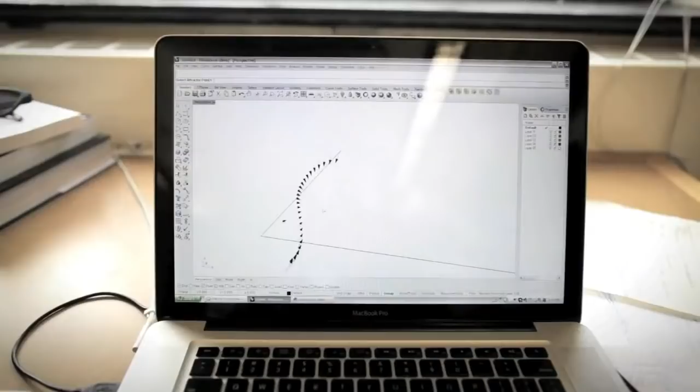MIT is a very different kind of institute. Instead of becoming the recipients of building industry culture, we can now change building industry by the kinds of experiments we're doing in school. MIT has a variety of departments so powerful that they have the potential of radicalizing what we do in design and architecture. Even the way we've structured our curriculum around workshops and collaborations fosters this cross-disciplinary platform. So we're situated perfectly for the kinds of things that only MIT can do.

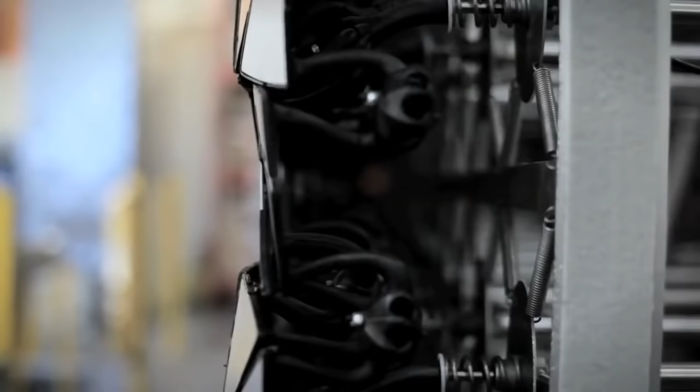The invention of human artifacts of any kind always consists of three elements: the geometry, the process, and the material that constitute that artifact.

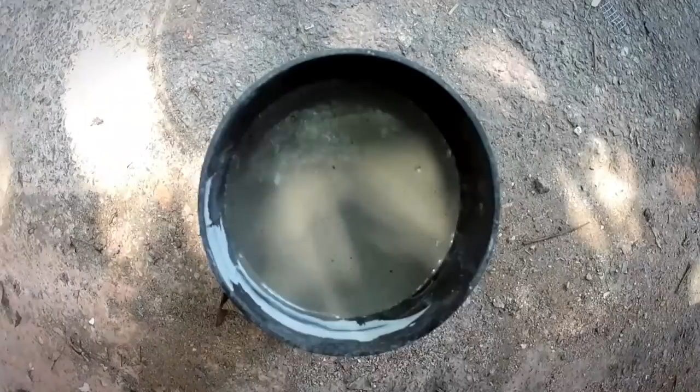It's very clear that new materials engender new forms, and architectural design benefits from addressing and applying new materials in an informed way. The Emergent Materials Group and the Urban Metabolism Group share a central interest in materials for the built environment. Lately, we've been working a great deal in the area of foamed materials, especially foamed cements and concretes.

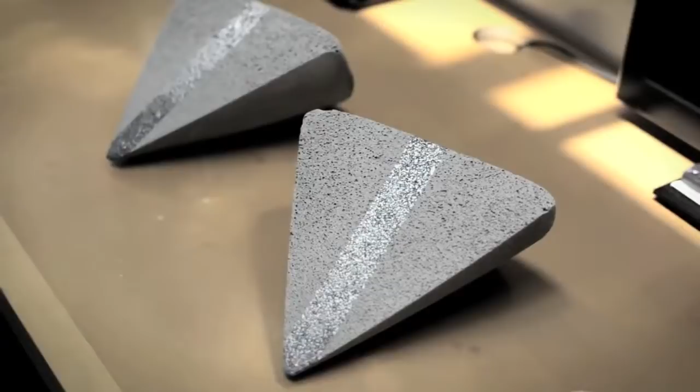Typically a beam in bending is going to have the greatest amount of stresses on the top and bottom, so we can reduce the amount of material on the interior of a beam.

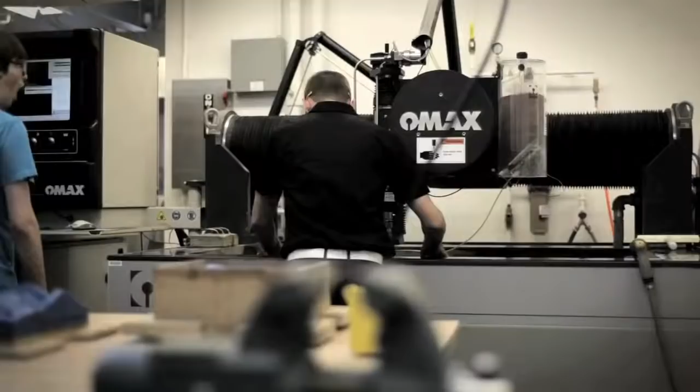The work really tries to address that there are two main paradigms throughout almost every industry. One paradigm is what can you design, what can you compute or analyze, and the other paradigm is what can you physically construct or build.

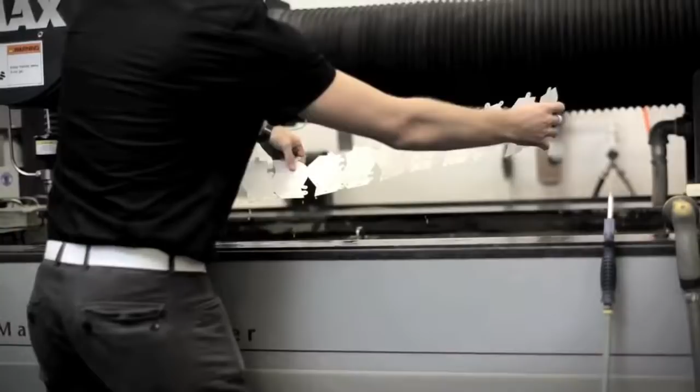The work really tries to traverse all scale lengths. It tries to work from the nanoscale, which is traditionally where we see self-assembly in biological and chemical examples, and bridge that, asking: can't we use this phenomenon of self-assembly as a new paradigm for building things at large scale?

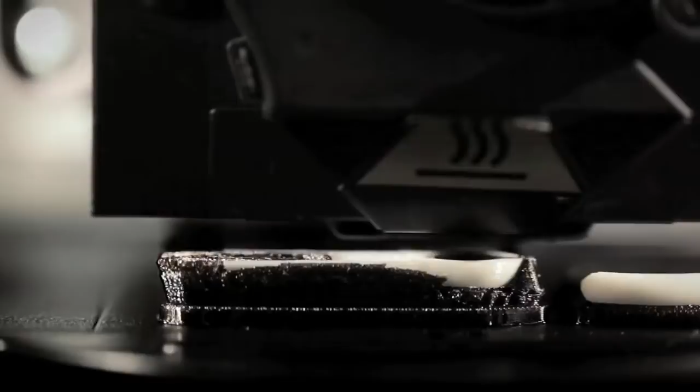We work with any type of material, synthetic or natural, and really try to design specific geometries that have materials in mind. When you design those two together, they can respond to energy. The energy sources can be heat, shaking, gravity, pneumatics, electronics—any type of energy. When you mix that with geometry and material properties, then they can respond and change state.

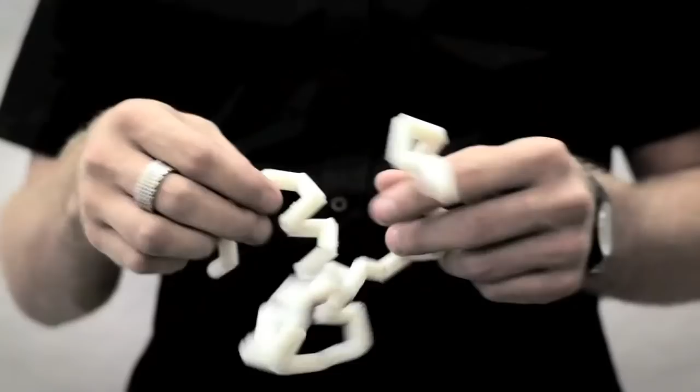Primarily, it will first be applied in extreme environments, scenarios where it's difficult to build. The research and the practice is really about cross-disciplinary collaborations between designers, scientists, and engineers working on this phenomenon of self-assembly, discovering where we find it naturally, where we can use it synthetically, and trying to apply that at all different scale lengths.

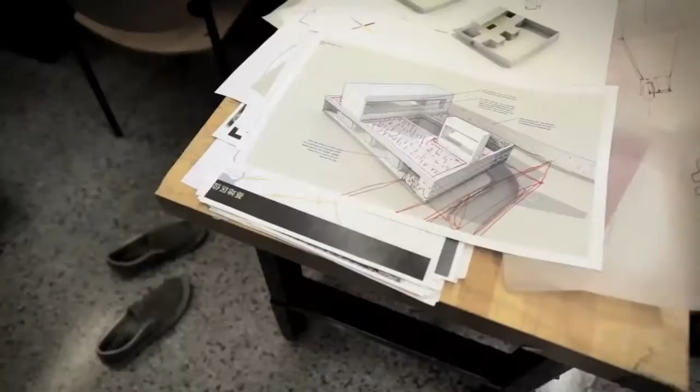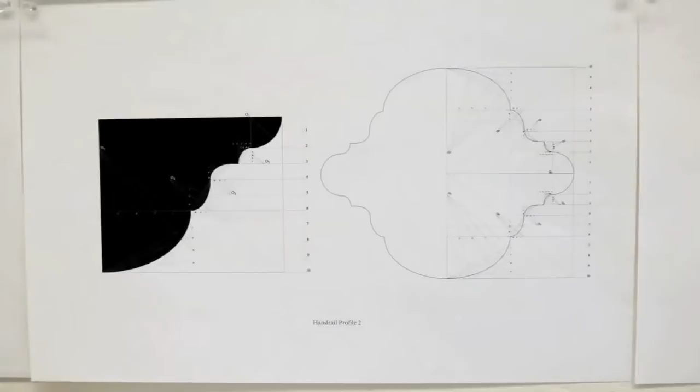The focus of our work, at least at this smaller scale—the scale of art installations or retail—we leverage CNC fabrication methods, but not as a way to exude their prowess necessarily, but more as a way to help us get at a particular formal agenda.

An installation called totems, which in a way is a kind of proto-architecture—not quite architectural, not quite sculptural—I think offers a kind of proposition to each of those disciplines.

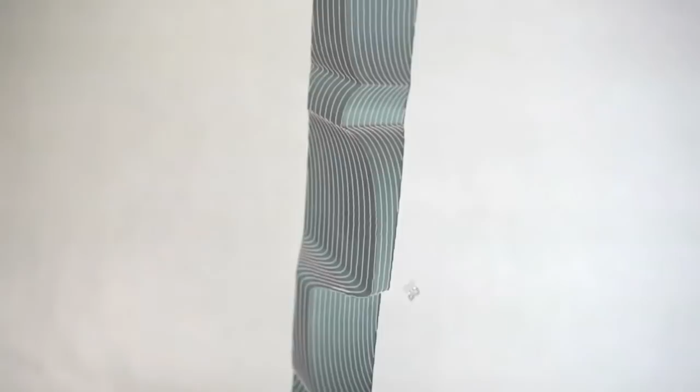We do a lot of testing via 3D prints. A lot of the formal investigations for totems specifically happened in 3D prints. We did maybe 30 to 50 3D prints of the totems as a way to understand how the light and shadows were working, and how best the anamorphic effects were working, before we went to the large format wire cutter.

In terms of collaborations, some of those happen here at MIT. Joel Lamere and I are developing an installation now, an anechoic chamber, which uses industrial felt both on its exterior and as a way to absorb sound on the interior. I'm bringing a disciplinary, formal, geometric interest on one hand, and also a certain set of specialized understandings of the behavior of these sheet materials on the other.

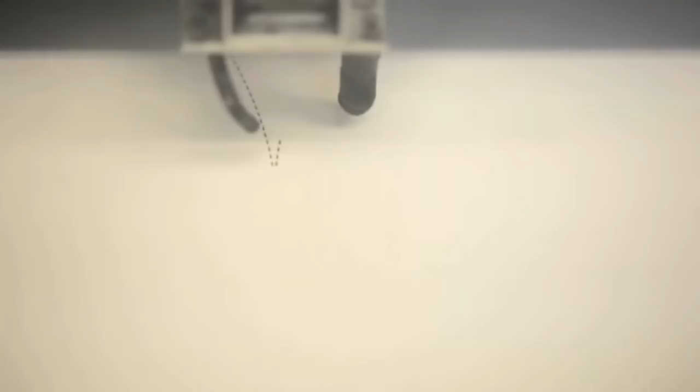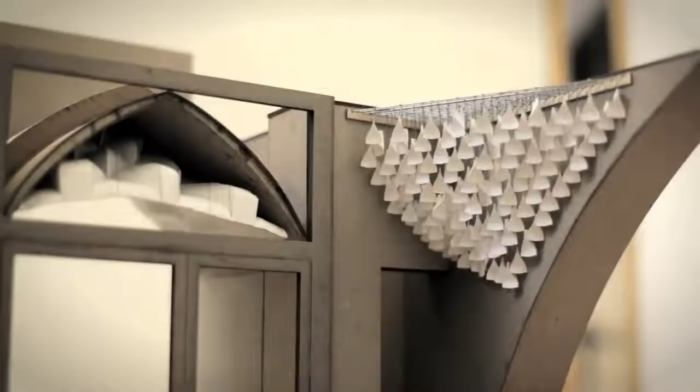My architectural interests are really broad, but in terms of my current research preoccupation, it's about material geometry—specifically sheet shapes or sheet material geometries, how they bend, stretch, stack, fold. Understanding sheet materials is really critical to architecture; there's a long-standing discourse on sheet materials because it's so ubiquitous in conventional construction. Everything including plywood, sheet metal, steel, aluminum, plastics—all of these have to deal with developable surface geometries, which is to say sheet shapes generally. So expanding the total set of understandings about sheet shapes is a totally worthwhile architectural undertaking.

These installations attempt to jump from the scale of the paper model to the scale of the architectural space, at the very least.

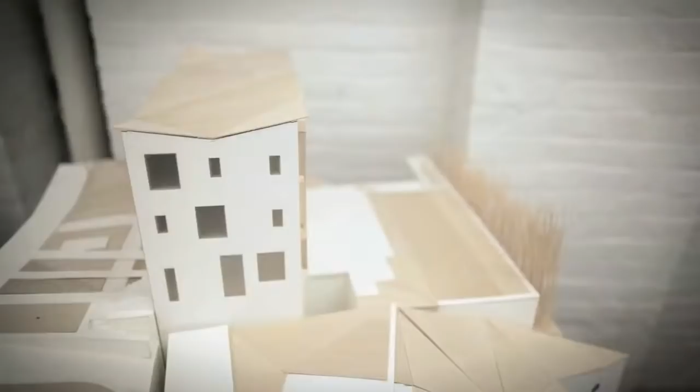Well, over the past 20 years, first as Office DA, now as NADAAA, we've identified two or three areas of focus. The first has been to look at materials and their behavior as a point of departure for many of the architectural experiments we do.

The second area is to recognize that materials don't have an endless limit. Everything comes in modules, in sheets, in blocks, in bricks, and without aggregation there's no way of beginning to figure out how construction works in general.

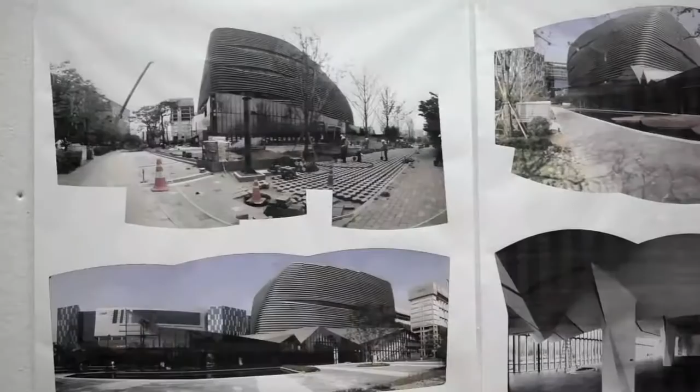So the detail of bringing things together as a point of departure has been another central focus. This has been a kind of point of revolution for a range of projects that we've researched and undertaken, some at the scale of a piece of furniture, others at the scale of a building, and others really at the scale of urbanism.

One of the agendas of the studio is to create interactive architectures for public space through design and technology. These projects can range in scale from the scale of the body, such as the Defensible Dress Project, which is a wearable architecture that uses a microcontroller and shape memory alloys to defend your personal space,

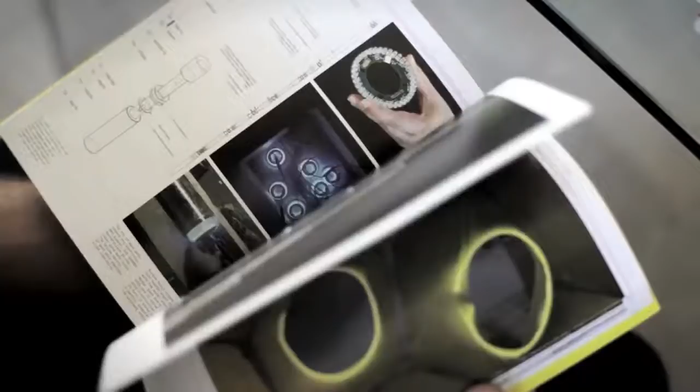to very public scale infrastructural projects, such as our proposal for the Audi Urban Future Initiative, where we're speculating on high-speed regional infrastructure and transformations in the city around issues of mobility for the year 2030.

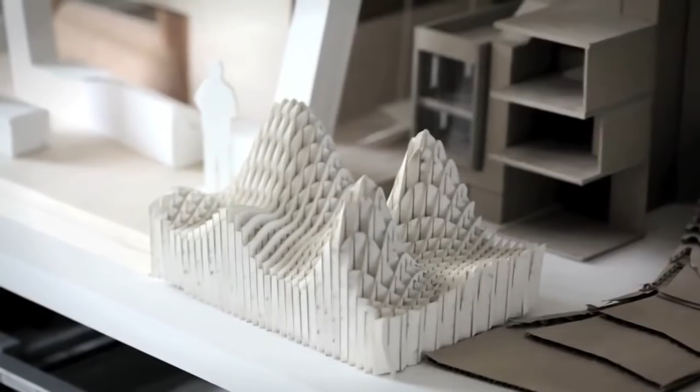It seems now more and more necessary that our environments have to become smarter, more responsive, and more flexible. The way in which architecture is made needs to be completely rethought if we're to go beyond bricks and mortar to engage the challenges of the next century.

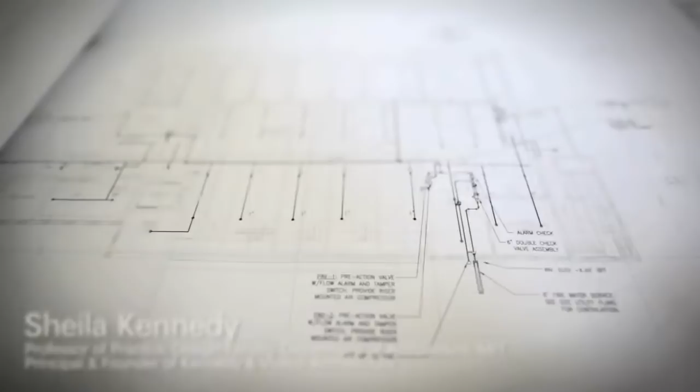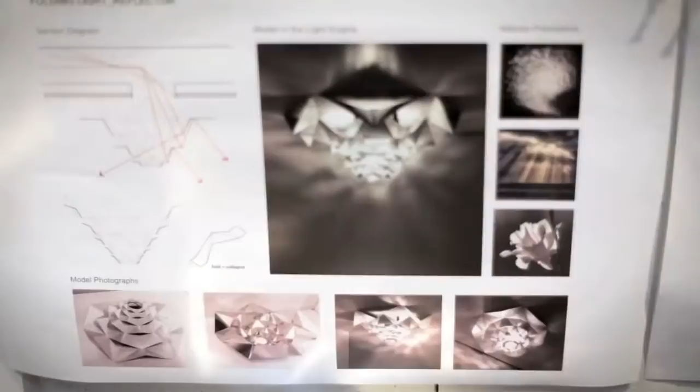My work as an architect focuses on designing architecture and urban scale interventions that engage the emergent infrastructure of our time. We're interested in how design engages that mutability between energy and matter, when materials generate energy or store it, when materials are dynamic and change state, exchange heat, produce light, or communicate information.

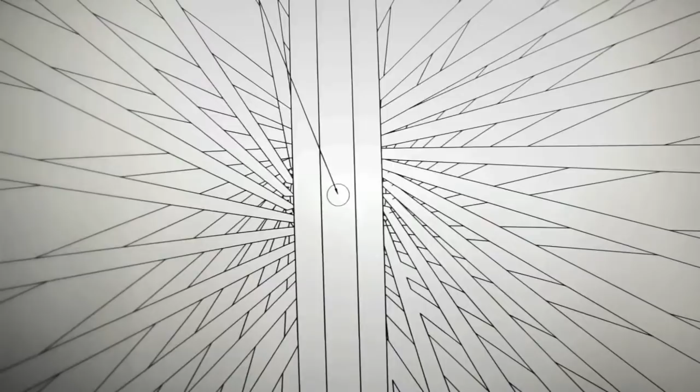The challenge, I think, for the discipline of architecture today isn't in digital fabrication, it's in material fabrication, in thinking about what it means to be material today when we move fluidly between digital and physical realms, how we use materials and not waste them, and how we form materials and how we transport them.

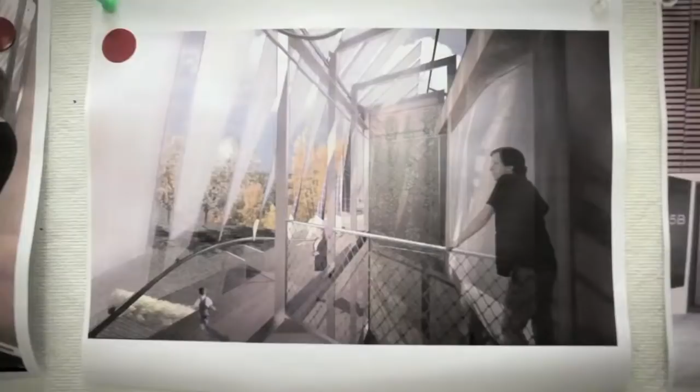If we're going to change the building industry and regenerate an innovation-based manufacturing segment in the United States, then I think we need to do this from within practice, from working with the norms of the building industry, but not settling for those norms, instead innovating to both accept and transform those standard conditions.

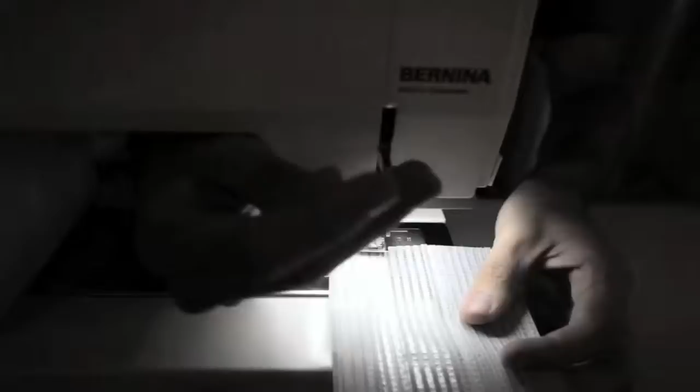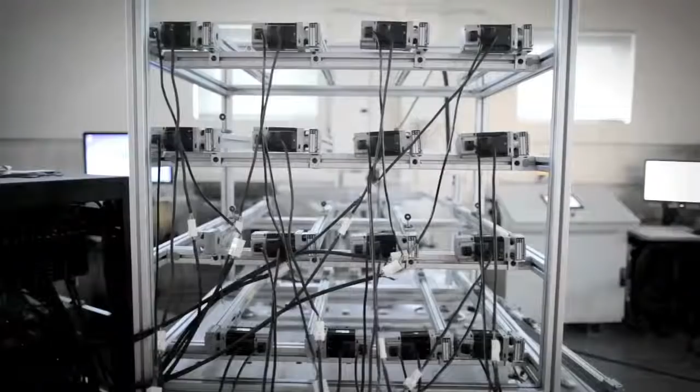I think we're pursuing several initiatives relating to computational material at several different areas. Dynamic interactivity is one with Hyposurface, and we're driving that forward, imagining actively alloplastic environments, if you like.

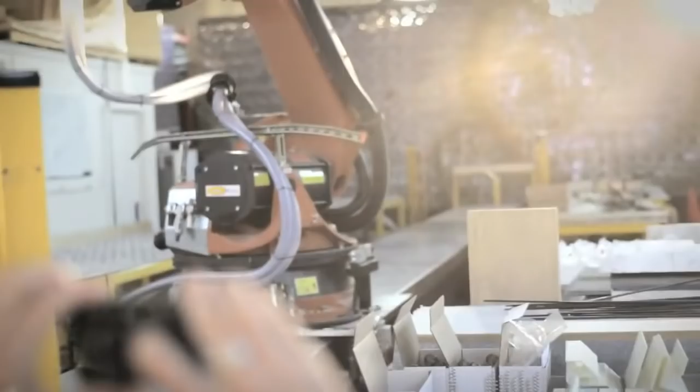It's a demonstration of the power of computation come real time. Then in the robotic manufacturing work, we're looking for sort of power, information and material all coming together, but with control directly at the architect's workplace.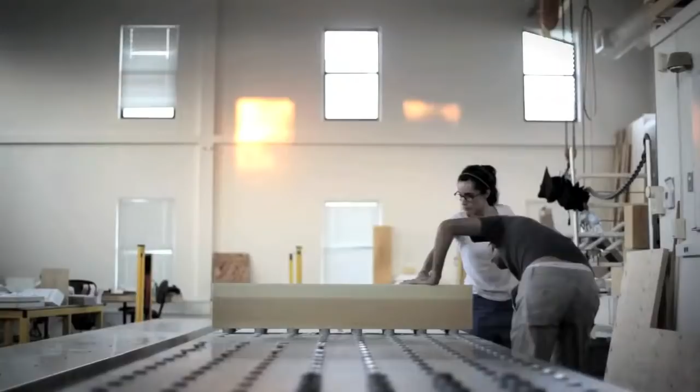So we're developing tools that allow architects within their native software like Rhino to pilot a powerful production machine like a KUKA robot, demonstrating, I think, what will be the future of manufacturing, which is sophisticated algorithms and modeling that link directly to sophisticated manufacturing machines and allow both new efficiencies but new versatilities, new formal complexities.

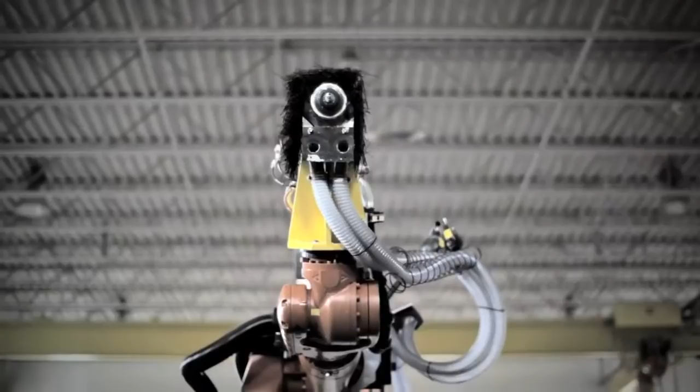I'm also frustrated by the slowness of the building industry to innovate materially. There's a fantastic amount of research in material science that's pent up and is just dying to come at a period where the environmental concerns are becoming so enormous, and the challenge of building the developing world is so extraordinary that they're necessary.

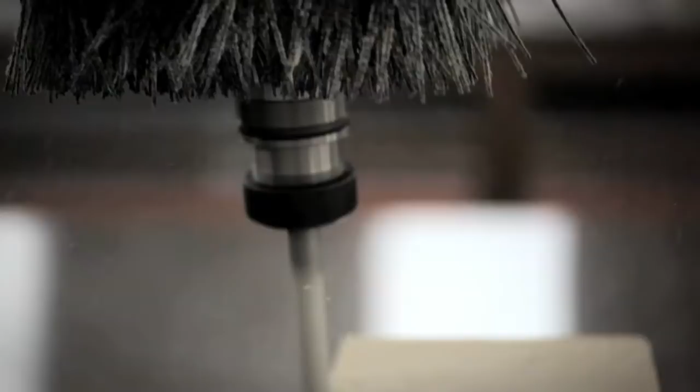CAD/CAM meets material science like composites, I think, is going to breathe a whole new life into the architectural and building industries.